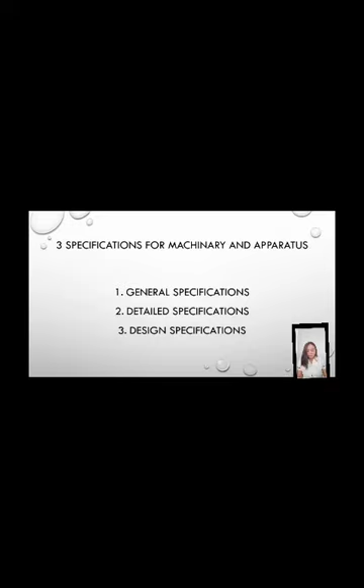So, general specification is usually prepared for occasions when it's proposed to purchase standard designs of manufactured machinery. If we elaborate, a specification is a detailed description or design of a material used to make something, or a precisely identified requirement. Apparatus means technical equipment or machinery that is needed for a particular activity or purpose.

So, number one, general specification. It is usually prepared for occasions when it's proposed to purchase standard designs of manufactured machinery. In shorter terms, the general specification is a brief description of a machinery, but it does not form part of a contract document. So, general specification is just a brief description of a machinery.

Detailed specifications are usually prepared for occasions when it is proposed to purchase machines which are designed by the manufacturer but which are manufactured to order and are more or less special in accordance with the demands of the purchaser. So, detailed specification is if you add a proportion, a detail, or something you want to add in a machinery. In shorter terms, detailed specification is limited edition.

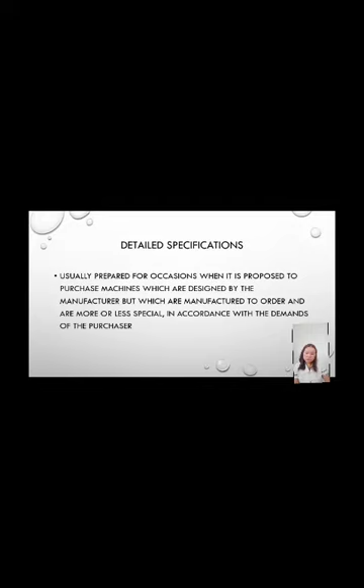Next is the design specifications, usually accompanied by complete detailed plans, which designate definitely and minutely in full detail every part and portion of the machine to be provided, describing the material from which it is to be made, its qualities and strength, the workmanship and finish, and the weight, size, and dimensions of all parts.

So, design specification is more complicated than detailed, because in detailed, it is designed by the manufacturer and manufactured by them. The manufacturer will manufacture that machinery if you order it from them. But the design specification is not as easy as the detailed, because design specification is for you to design your own machinery, and you send it to the manufacturer for them to make what you want.

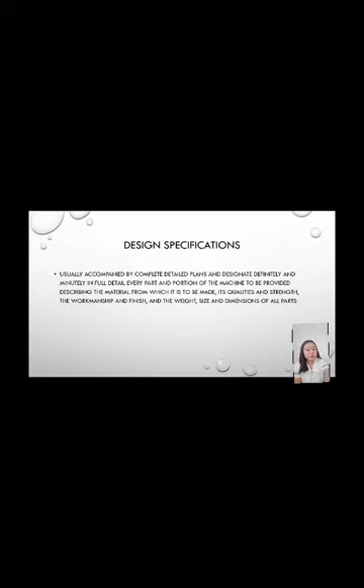So, design specification is the one that you designed with complete details, with what you want the details to be, and what height, size, or dimensions you want in that machinery. It is not designed by the manufacturer; it is for them to make for you. So, that is made to order also, but it is more complicated because it is your design.

Selections are where the specifications are general and not specific. The standing and experience of the maker become important, and investigation of his general reputation, the length of his experience, the facilities he possesses for manufacturing, and the design and workmanship of the machinery ordinarily made by him. Selection, by its meaning, is not specific. Selection is to choose from. So the manufacturer's reputation is at stake in the selection stage.

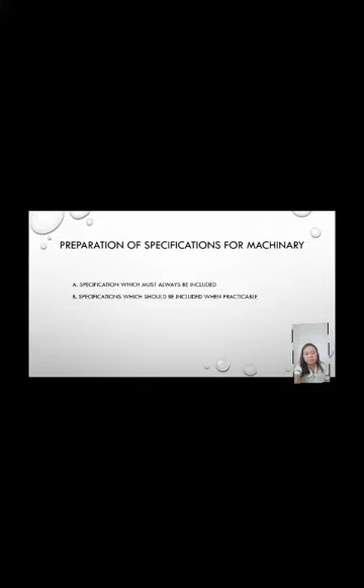Next is preparation of specifications for machinery. A is specification, which must always be included. There are also things that you'll consider in requiring specifications for steam boilers, such as number of boilers required, steam pressure, boiler capacity, purpose for which boilers are desired, where boilers are to be delivered, foundation and settings to be furnished by whom, boilers to be erected by whom, specified tools, fittings, and equipment to be furnished with boiler, time of delivery, detailed specifications, and design specifications.

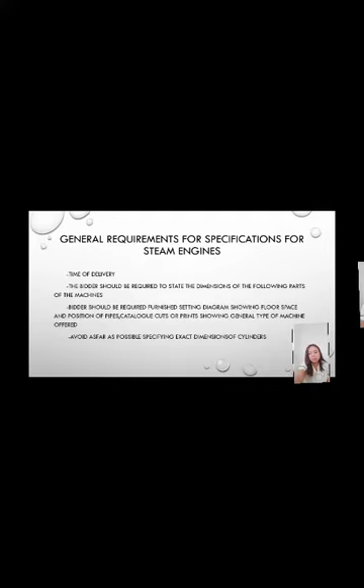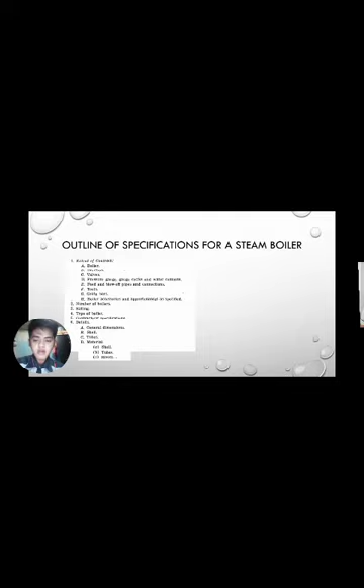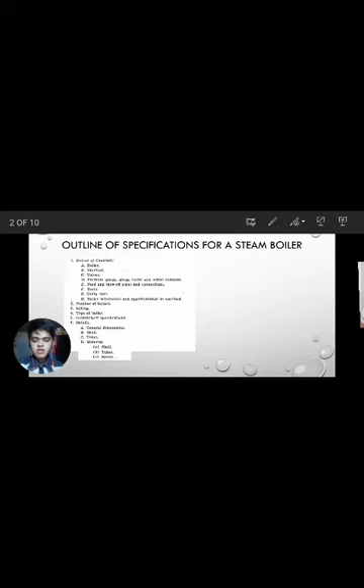The boiler specification should also include position, type, economy, guarantee, insurance, and forfeiture, and also the payments. It will also require general requirements for specifications for steam engines. Its specifications include number of engines required, steam pressure under which the engines will operate, horsepower required, where the engines are to be delivered, by whom the foundation is to be built, by whom the engines are to be erected, tools, fittings, and equipment to be furnished with the engine, and time of delivery.

The bidder should be required to state the dimensions of the following parts of the machine. The bidder should be required to furnish setting diagrams showing floor space and position of pipes, and catalog cuts or prints showing the general type of machine offered. Avoid as far as possible specifying exact dimensions of the cylinder.

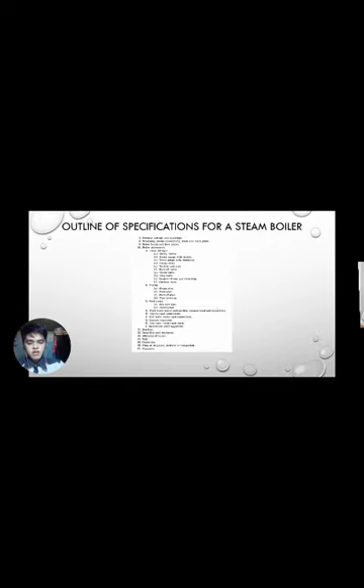Another requirement for specifications for an electrical generator or motor is that the bidder should be required to specify the type of machine on which the proposition is made. The bidder should be required to furnish a setting diagram showing the floor space and position of connections, and catalog cuts or prints showing the general type of machine offered. In general, it is desirable to require the bidder to submit detailed specifications describing the general and particular features in the construction of the machines on which the proposition is submitted.

Avoid as far as possible specifying exact dimensions or other features, for detailed specifications requiring departures from the maker's standard mean extra and often unnecessary expense. So those are the general requirements for specifications for an electric generator or motor.

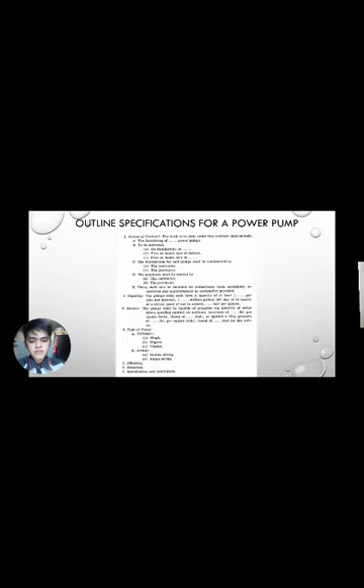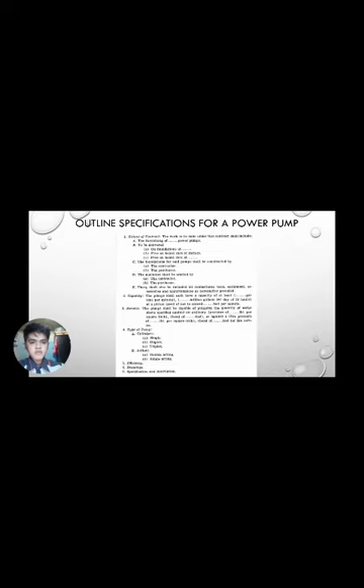It should be double acting or single acting. Number 5, efficiency. Number 6, the drawings. Number 7, specification and description. Number 8 is the general design. Number 9 is the general dimensions. Number 10 is the general details of the construction: the pump frame, water ends, water valve constructions, power ends, water connections, lubricators and oil cups, pipe size, foundation bolts, and foundation. Number 11 is painting and finishing, 12 is the furnishing, 13 is the erection, 14 is mark, 15 is factory test, 16 is test for acceptance, 17 is guarantee and insurance, 18 is time of completion, and 19 is the payment.

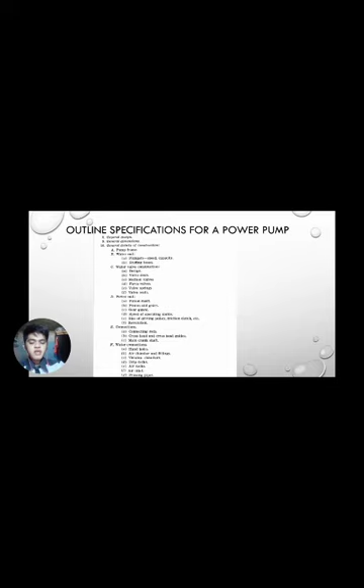The specifications. After the preparation of the outline previously described, the engineer should prepare with great care the specification for the machine or appliance desired. All that has previously been discussed in regards to the writing of the specification should be kept fully in mind, and everything should be done to assure that the specifications shall be full and complete, clear, and explicit.

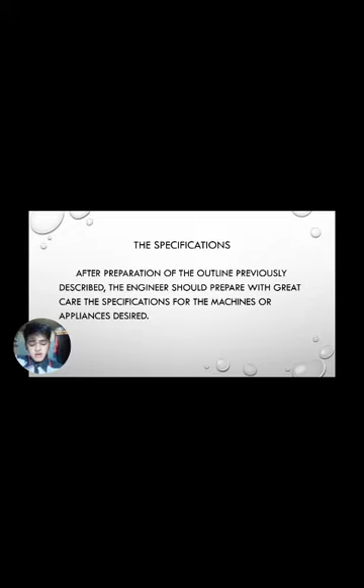If the outline has been prepared with care, the attention of the engineer can be confined to the preparation of the specification in carefully worded and exact language which will assure a clear interpretation of his requirements by elimination of all indefinite, indeterminate, and ambiguous language. If all arbitrary, unfair, and unnecessary requirements are eliminated, he will be reasonably assured of a low and intelligent proposal. The following statements of the requirements of general specifications will further illustrate the matters and arrangement suggested. General specification for machinery.

When general specifications for machinery are to be issued, they should include the following. Number 1, the extent of work. In this specification should be defined in general terms what is required under the contract, including the furnishing of the machine or the number of machines required and the point of delivery, and also the preparation of foundations and by whom, the erection and by whom, the various furnishings, tools, fittings, and equipment required with the machine.

Number 2, the capacity. Under this head, the capacity of the machine should be specified. This specification should define the amount of quantity and the rate of the work which the machine will be required to do or accomplish in the specified time. Number 3 is the service. Under this head should be included the specifications regarding the pressure intensity against which the machine is to operate. This would include, for steam-driven machinery, the steam pressure to be furnished to operate the machine, and in pumps, compressors or electrical generators, the pressure against which the machinery is to operate.

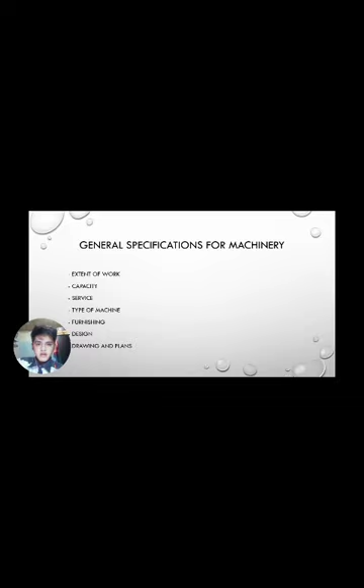Specification of boilers. Specifications of boilers are the following. First, the number required: there shall be a 150 horsepower boiler. The second is rating. The horsepower of the said boiler shall be rated on evaporating 30 pounds of water per horsepower per hour under 70 pounds of steam pressure with feed water at a temperature of 100 degrees Fahrenheit, or the equivalent to such conditions. Number 4, type of boilers. The boilers shall be externally fired return tubular boilers, water tube boilers, or return tubular boilers. Number 5, description and drawings. Detailed description and drawings, tracings or prints shall be furnished showing in detail the dimensions of every part of the boilers and appurtenances thereof.

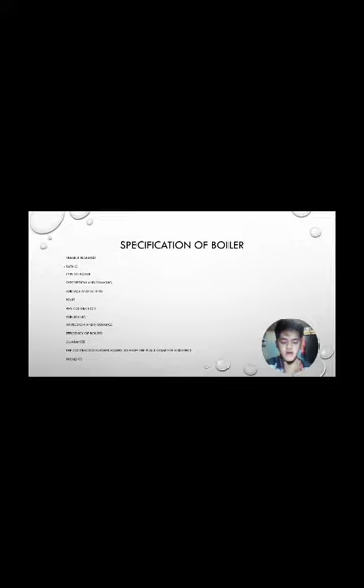Number 10 is inspection and insurance. The boiler shall be inspected and insured by the Hartford Steam Boiler Inspection and Insurance Company. Number 11, the next is efficiency of boilers. The boiler shall give the efficiency guaranteed by the contractor in his proposal. The next is guarantee. The contractor guarantees the design and workmanship to be as specified in this specification and in the specifications furnished by him accompanying his bid for the work in question. The contractor further agrees to have the plant complete and erected on the foundation and ready for use by the day of the 19th, subject to the general form of the contract.

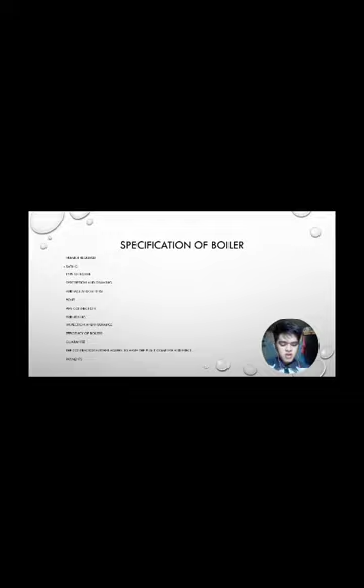The next and last is the payment. One third of the contract price for said boilers shall be due and payable when the boiler is received in apparent good order, and one third additional shall be due and payable after the boiler has been successfully tested in accordance with those specifications.